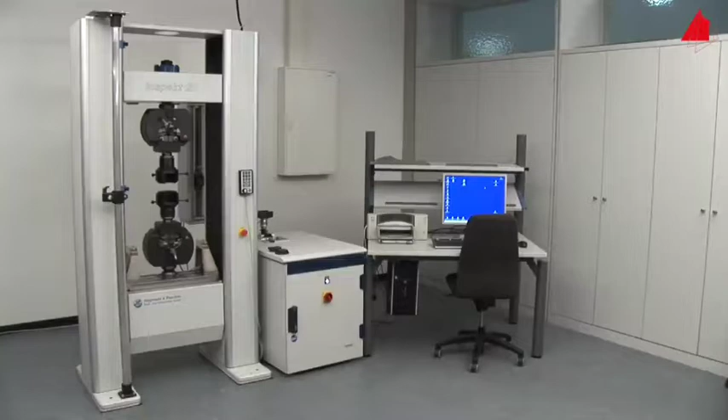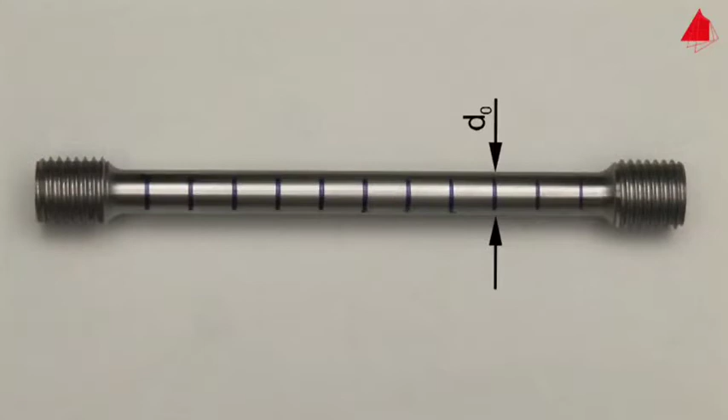The tensile test. First test, material with yield point phenomenon. In the first tensile test, a plain carbon steel with yield point phenomenon is to be tested. This is the test piece. It has a cylindrical test region with an original diameter of 10 mm and an original gauge length of 100 mm. Within this test region, distance marks have been drawn at regular intervals. They help to visualize and measure the plastic behavior of the specimen.

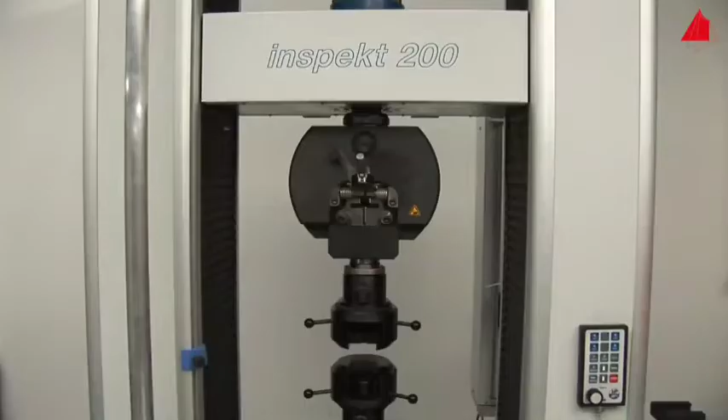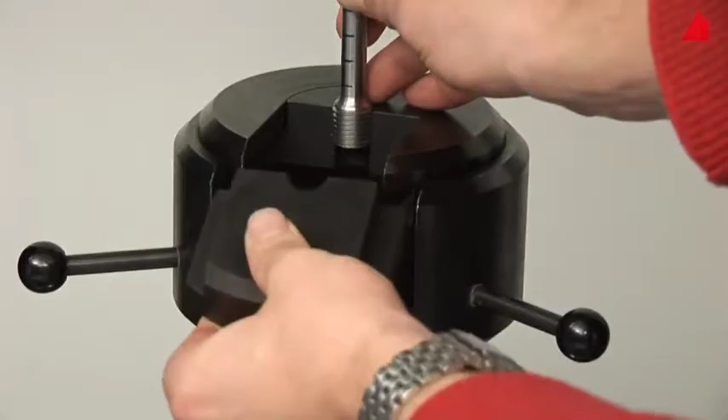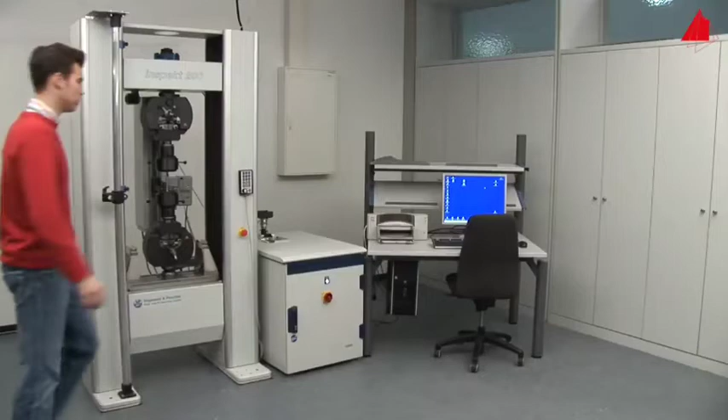Using a hand control, the tester moves the upper crosshead into its correct starting position. Now he can place the threaded ends of the test piece in the lower and upper grips of the testing machine. In the next step, he swings the extensometer into its working position and checks that everything is correctly prepared. Then he selects all necessary testing parameters on the control computer.

Ready. The test starts and the extensometer's sensor arms are carefully pressed onto the test piece. This way, the gauge length can be measured throughout the whole tensile test. The gauge length is displayed at the bottom right-hand corner of the screen. At the beginning, it amounts to 100 mm. During the tensile test, the test piece is slowly and constantly elongated with a standardized speed. The force that the test piece opposes to the imposed elongation is recorded and can be seen at the bottom left-hand corner of the computer display.

The material behavior can best be observed in a force elongation diagram. The force F is being plotted upwards on the vertical axis, the elongation delta L towards the right on the horizontal axis. At first, the force rises rapidly. Force and elongation are proportional and form a steep, straight line in the diagram. In this area, the material behaves elastically. If the test piece were to be unloaded from this area, it would spring back completely to its original length.

In materials with yield point phenomenon, the end of the elastic area can be seen clearly. The plastic deformation starts abruptly and is accompanied by a sudden drop of force. If the test piece were to be unloaded now, it would not spring back to the original length, but instead show a permanent elongation. In the next stage of the tensile test, an almost constant force level with slight fluctuations occurs. This phenomenon is called the Luders effect.

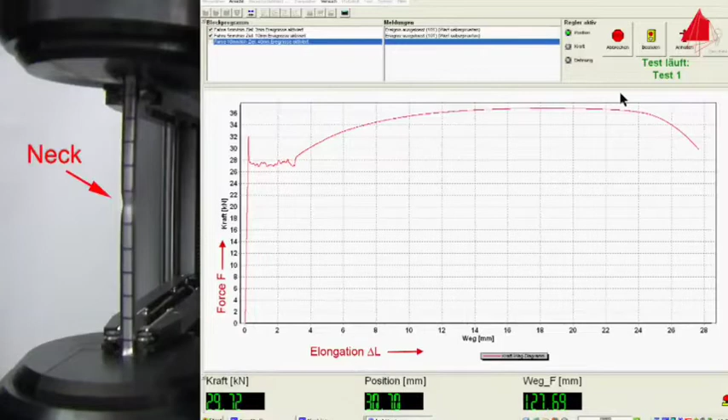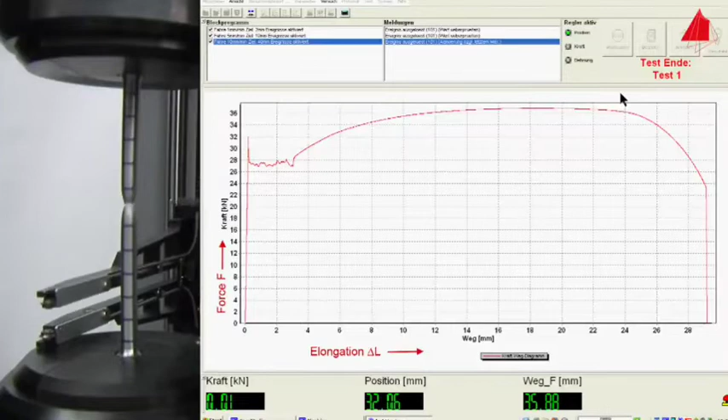In the recorded force elongation diagram, the force FEH at the upper yield point can clearly be seen. This is the highest force the test piece can sustain elastically. FEL is defined as the force at the lower yield point, Fmax as the maximum force. Using these forces, the strength properties of materials can be calculated.

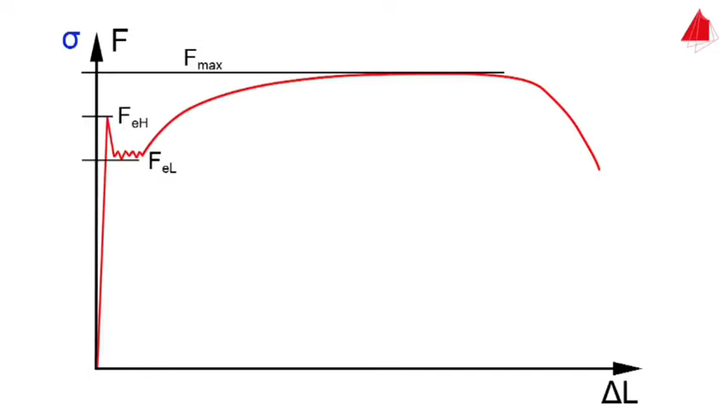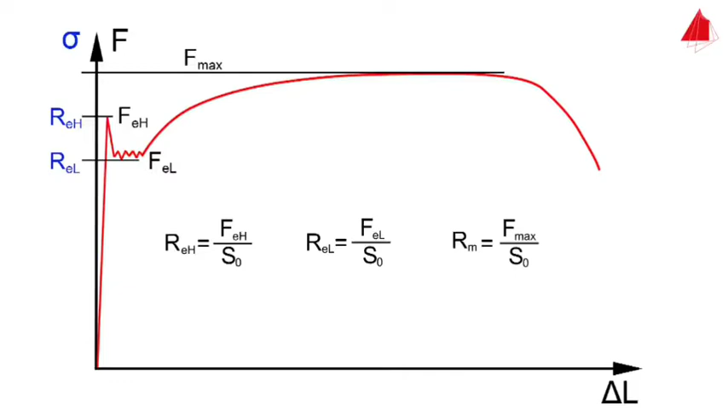The upper yield strength REH is calculated by dividing the force FEH by the original cross-sectional area S0. The lower yield strength REL is defined in a similar way. The maximum force divided by the original cross-sectional area is called tensile strength RM.

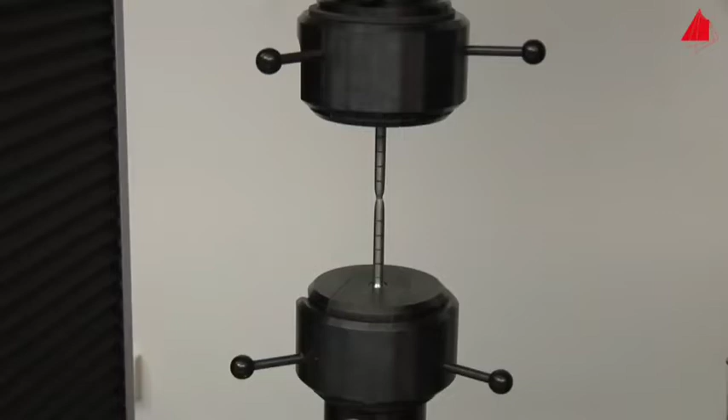In the last step, the tester swings the extensometer back into its resting position and removes the broken test piece. On the work table, he puts the fragments back together again. With the help of the distance marks, the percentage elongation after fracture can be determined. This is the permanent strain after fracture and amounts to about 30% in this example.

Please note that the percentage elongation after fracture depends on the length to diameter ratio. By measuring the smallest diameter at the point of fracture, the percentage reduction of area can be calculated. It describes the reduction of cross-sectional area at the point of fracture in relation to the original cross-sectional area.

In the second tensile test, a material without yield point phenomenon is to be tested. In this case, it is a precipitation-strengthened aluminium alloy. The test piece has exactly the same shape and dimensions as the specimen in the first test. It is cylindrical, with an original diameter of 10 mm and an original gauge length of 100 mm. After fitting the test piece into the testing machine and panning the extensometer into its working position, the test can start.

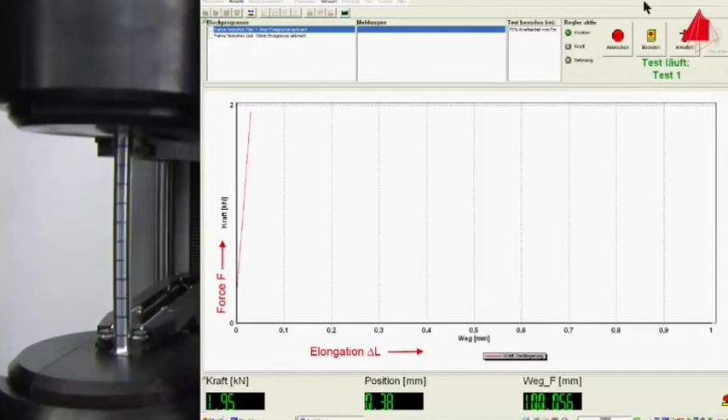The initial linear curve in the force elongation diagram again shows the elastic behavior of the material. But this time, the end of the elastic area is not revealed by a sudden drop of force or any distinct change. There is a smooth and gradual transition from linear elastic behavior to plastic deformation.

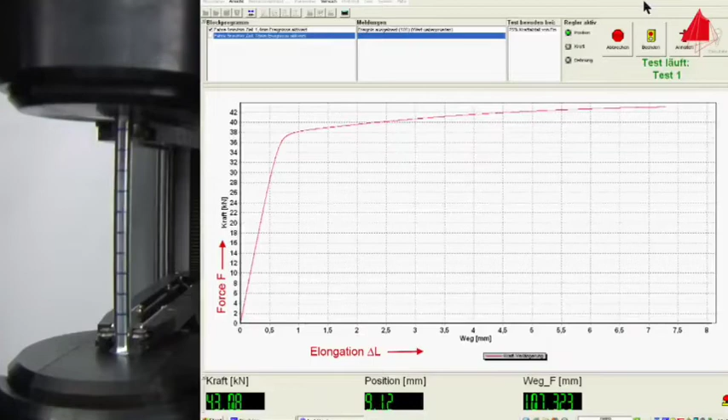In the further course of the tensile test, the force increases and the test piece again is strained uniformly along its length. At the point of maximum force, a neck develops and all subsequent plastic deformation is confined to this neck until fracture finally occurs there.

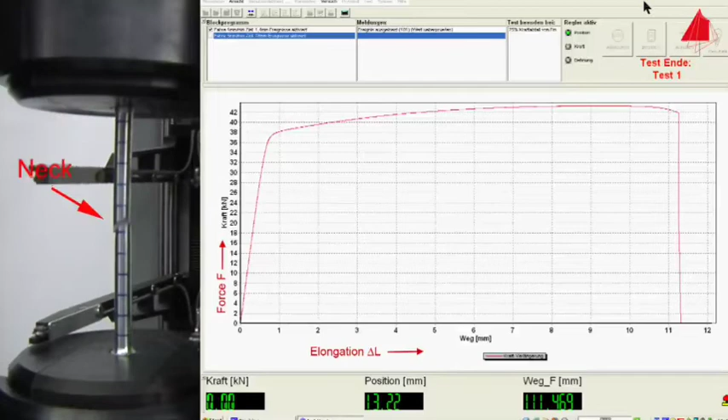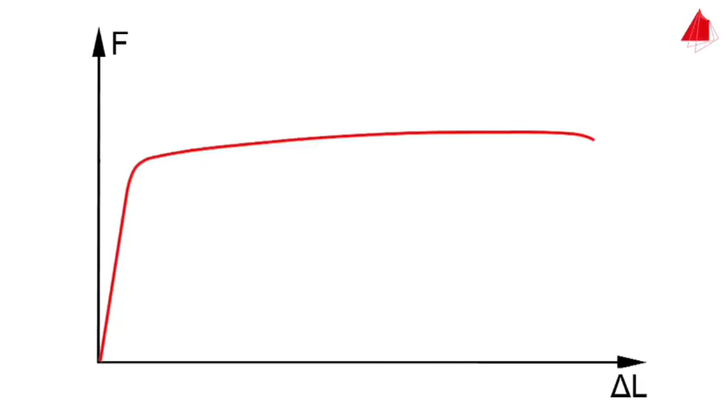As a common substitute for the yield strength, the 0.2% proof strength is used. It is the stress that causes 0.2% of plastic deformation in the material. And this is the way to calculate it. First of all, the elongation that corresponds to 0.2% of strain has to be computed. For an initial gauge length of 100 mm, the result is 0.2 mm.

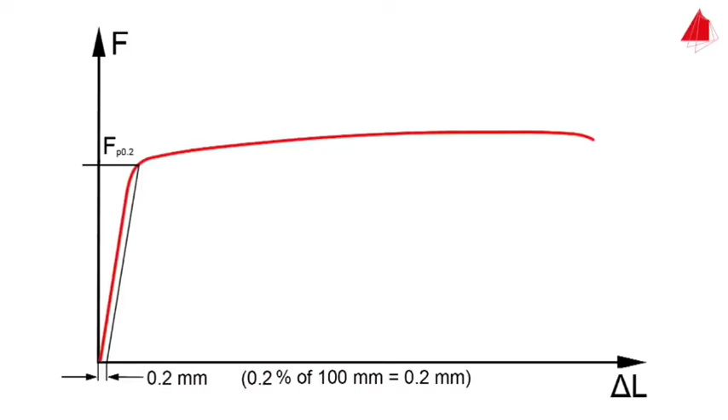In the force elongation diagram, a straight line parallel to the elastic line is drawn through the offset point of 0.2 mm of elongation. The force at the intersection point of the offset line with the force elongation diagram is designated as Fp 0.2. This is the force that causes a plastic strain of 0.2%. The 0.2% proof strength, Rp 0.2, is equal to Fp 0.2 divided by the original cross-sectional area S0.

Tensile strength, percentage elongation after fracture, and percentage reduction of area are calculated in the same way as in the first test.